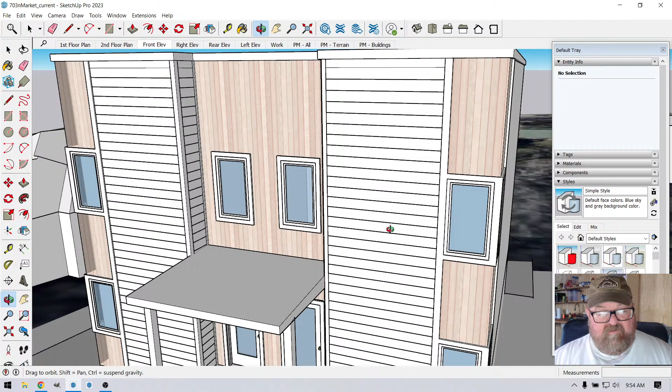It's not typical. Most people wouldn't try this too much because it takes custom framing, and builders and developers don't want to go out and work on the job with their framers explaining everything. Me, I like being on the job. That's one thing when I started Artisan Construction LLC - I said I'm going to be there when the framing's going on, because most builders just want windows that are easy, placement's easy, no questions asked.

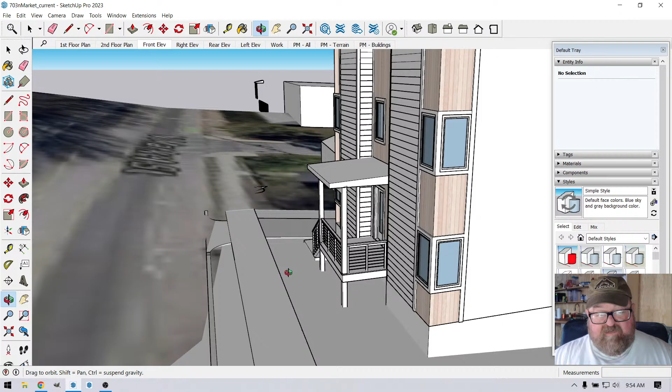So anyway, I do these drawings in a schematic mode at first, and you can see it's just a shell to get the concept down and understand how close this needs to be to the street. This is in an urban zone, a special zone where they really want you to put the buildings closer to the street, and fill up the lot. They don't want you to have a little tiny house in the back corner because it screws up the streetscape. This terrain comes from this placemaker extension.

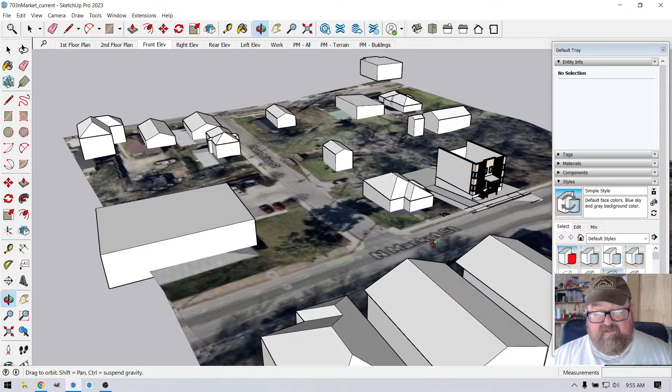Anyway, it allows you to download geographical or topographical information, and it will attempt to actually put the buildings there. Obviously it's got limited information from the site, but it's kind of cool because it gives you an idea. Now, these townhomes from here down are going to be as tall or taller than our building.

So anyway, let me get to the floor plan, and I'll show you what I was talking about for the townhome versus duplex. Ours is oriented this way, just on perspective. This is the street out here, and I haven't put this in the proper layer yet, so it's showing up on the floor plan.

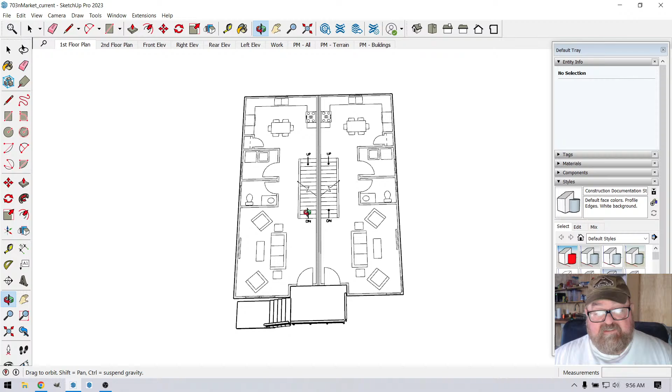But basically, a duplex is - well, let's just turn on the site plan. Where's my site plan? Oops. Doobie-doobie-doo, where's my site plan?

Tags, site, property lines. Here we go.

You can see these inner city lots are kind of small, and well, this one's not. Yeah, it's 50 feet. So the typical urban lot is 50 by 150, but this one's a little bit deeper, 156.

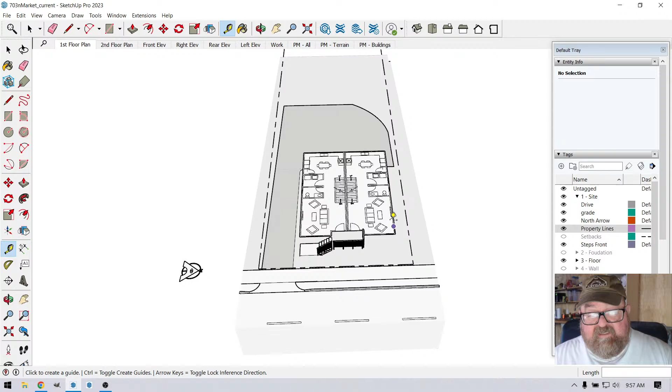And so on a duplex, you have just one single piece of property. If this were a townhome, there would be a property line down the middle of this property.

And this developer, he's a friend of mine, and he's really awesome. Mitch Everhart. He allows me a lot of freedom on these projects, and that's why I love building for him.

But in this case, this is a duplex, so we can build. We still have to have the same separation between the units. In other words, these two separate walls with an airspace and flame retardant. Anyway, it's a whole firewall system, but I don't want to get into that in this video.

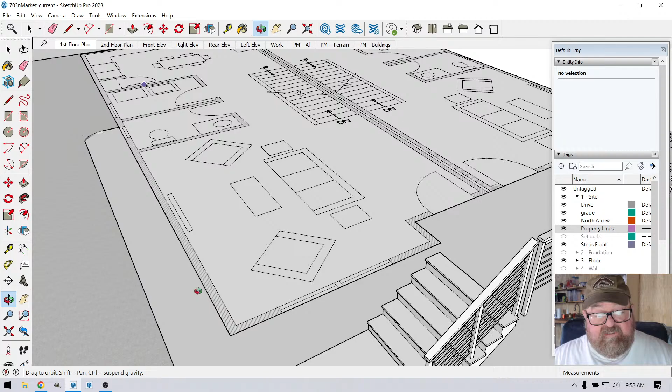What I'm trying to do here is, I had these windows on the front like this, and I thought it would be cool to be able to see down, if you're in the living area watching me on your TV on ArtisanTony, then you'd be able to look out the window at the same time and gaze like I do. Like I've got my window here where I can just turn and look out at God's gift of nature to us.

So in this case, it's a duplex. It's all on one piece of property, and it just has to have a fire separation, the wall between the units, but they can appear as one unit.

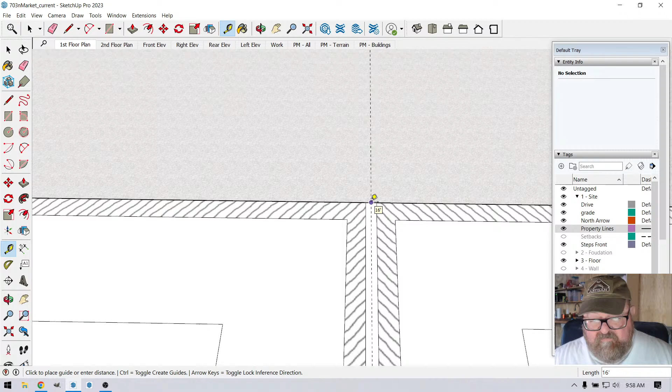A townhome would have a property line down the middle, and there would actually be, is there a middle? There it is. There would be a property line there, and these two would be owned by two separate people. So there you go. There's your lesson in townhomes and duplexes.

But what this video is about is, I want to get this effect. And I lost my little corner drawing. Let's see if I can undo. There it is.

I was going to show you how these things are normally framed. I guess I can just leave it there.

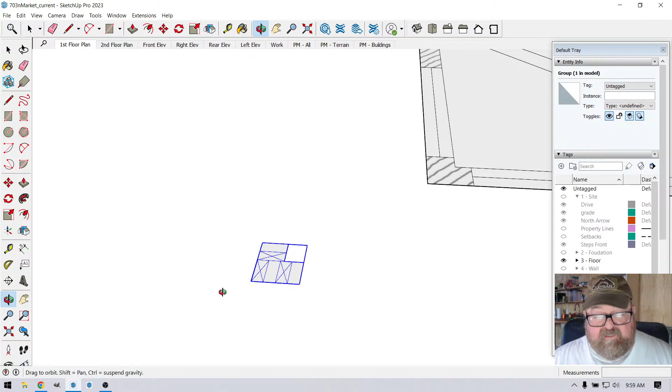Normally, and I'm going to show you this through actual 3D stuff here in a minute for studs, but on the plan view, what you would see is on a corner, you would have a 3 stud corner. We use blocks in the middle, and that's why there's a space here.

These X's mean you're cutting through something. So in this case, we're cutting through at about 5 feet off the floor, the studs, so you'd have an X to show you're cutting through, and these other ones would indicate that they're shorter than a stud.

Okay, so this actually, what we would do in the field is we would put a little, see if I can draw this freehand. We put a little O here on the plate, and then we put a C here, right, for corner.

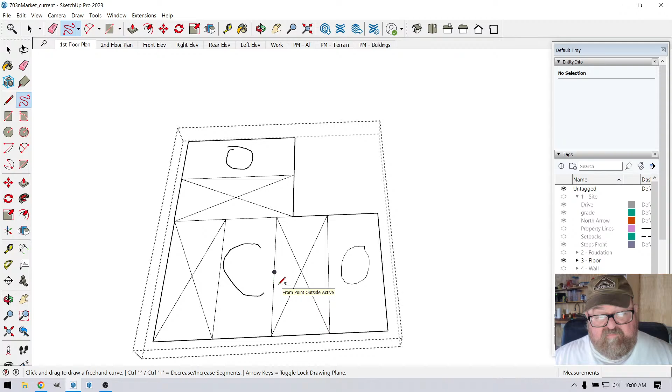So this is kind of how you can do the layout on your plates, and it tells the guys who are helping you frame what to do. That means this is a jack to hold up the header, and this is a jack to hold up the other header. Now what I'm going to try to do is use Medeek wall extension to see how close I can come to getting this.

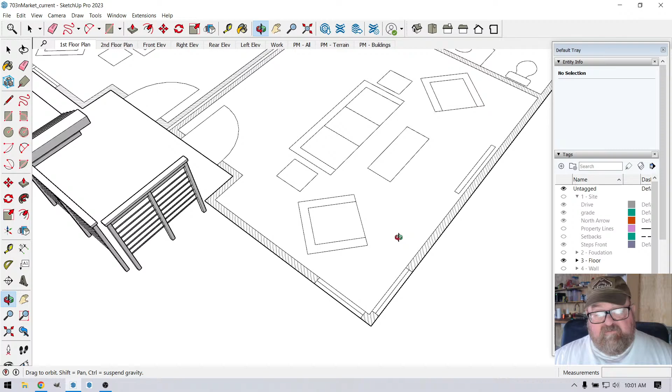Alright, so what I'm going to do is I'm going to use Medeek, one of my favorite wall extensions, not just wall extensions, wall, truss, roof. And I've got some walls that I've built before in here, and I've saved them, so I'm going to load 2x4 8-foot exterior wall. On the second floor of this building, it'll have 8-foot walls. On the first floor, it'll have 9-foot walls.

So I'm just going to kind of pretend I'm on the second floor, even though I think this is the first floor plan. But it doesn't matter. I'm just demonstrating how I think these windows are going to work. So I'm going to load that, and I'm not really going to pay too much attention because I'm going to go back and redo all this stuff.

I'm just going to, I got the wall, yeah, I got the wall layer turned off because I'm in the floor plan view. So let's turn wall on. Let's see, and let's turn wall scheme off. Okay, now that should work.

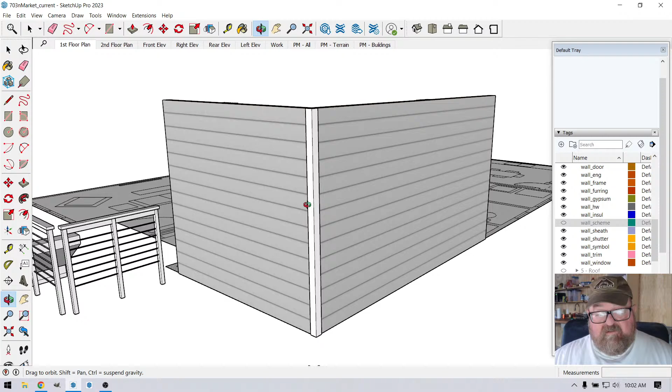There we go. I'm just going to draw just that much wall for now because we're just talking about corners, right? And the issue here is how can we get standard windows instead of paying—I don't know if you've ever seen corner windows.

We'll just take a quick look. I know I keep going down rabbit holes, but I think it's important to at least understand these windows.

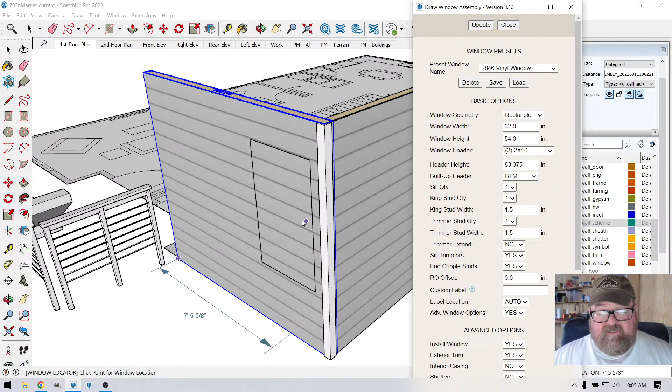We're going to come up with a nifty way, and I'm going to do it using Medeek extension because I just want to draw this quickly for this video. Now we're going to put a window in—this is my window, I've got a window I like, 2846, load—and see right here, it doesn't want to go. It's using logic. Now normally if you were doing this, that would make sense, right? I'd put it as close as I could.

Now what's funny is it's letting me put it closer over here, and that's because of the way the corners are framed. Depending on which way he's got his corners framed, whether this is the lead wall or that is the lead wall. The lead wall is the one that's built first.

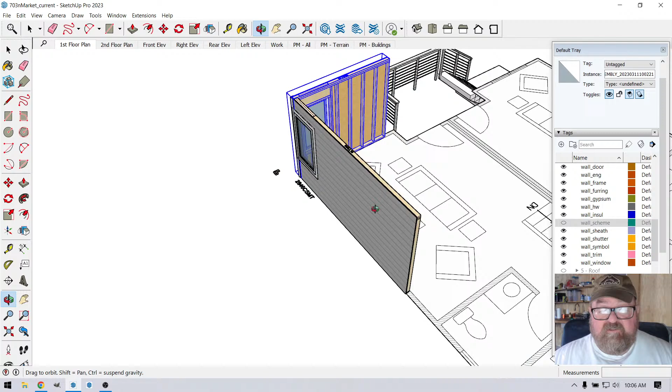And in construction, in residential construction or any other construction pretty much, the longest wall is built first. And we're going to turn off the siding right now just to—

It's wall cladding and wall sheathing, just because it's going to be easier to see. We want to turn off that too. Yeah, it's going to be a lot easier.

So normally what you do is you build these long walls first, laying on the floor. And you build the longest wall first. The reason you do that is because you go from the longest to the shortest walls, and that becomes very obvious to you when you're building.

If you built the short walls first, that would be in the way of building the long walls. So you build all the perimeter walls first, and you build both long walls first. Typically what we would do is build this long wall, leave it laying on the floor, build this long wall, leave it laying on the floor, and then we'd raise them at the same time. And then we'd come back in and build the shorter walls and raise them up, progressively.

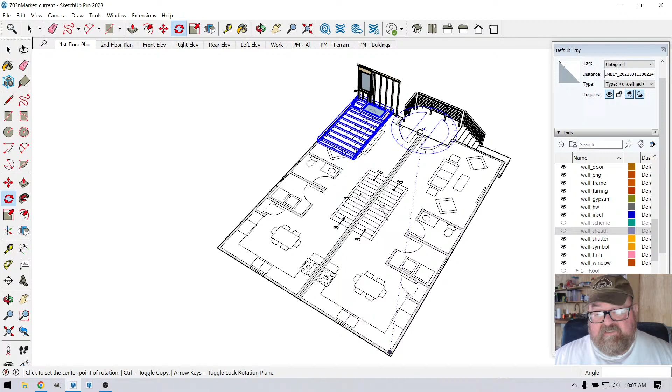Well, see here, actually on a duplex, this middle wall will be built first—these middle two walls will be built first. You build one side, and you do all your drywall, your Type X drywall work, and there's new systems now that you can use. I'm going to redraw this to show the new systems where it's just one thickness—I think it's Gypsum, USG has a product, it's just one thickness in the middle—and then you build a typical wall on either side of it.

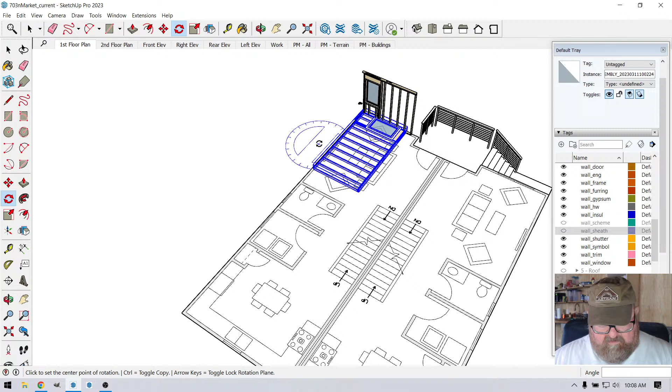All that would be done first, and then these two long walls, and then the shorter ones. You progressively get to the shorter walls, and they're not in the way. And the reason that's important is, I think, because of what happened going around this corner - I drew it this way, so it built the leading corner on this side of the wall.

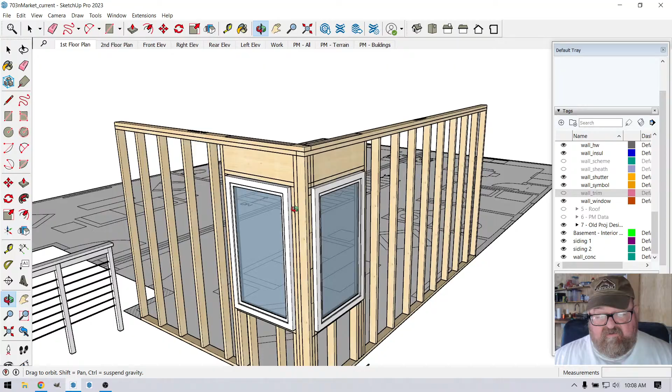I want to turn off the trim for a second too, because what I'm really trying to show is the framing. I knew at some point I'd have to explode these walls, but I wanted to get it to this point because it's a lot quicker using Medeek's extension just to demonstrate what I want to do.

So what I'm thinking about doing is exploding this now because I can see some conflicts already, and I'm going to show you how I want to do this. I've got two different ways of doing it. I think what I'm going to do is replace the corner with a...

Let's see - yeah, it's showing this wall as proper though, because the three studs should be facing this way. The only thing is it let me put that window in there. Let me move that over. Let's see how much it has to be moved over.

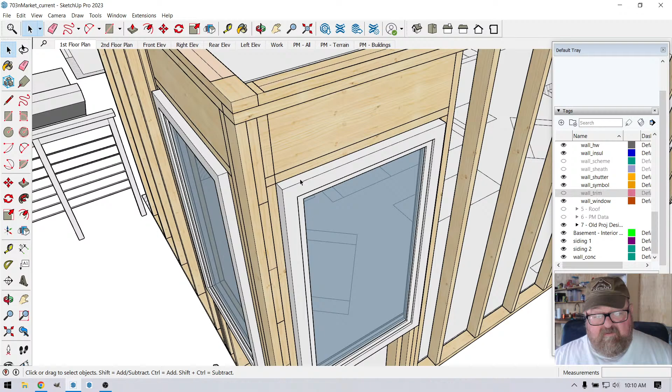1.5 inches, yeah. So this is another cool thing about Medeek's extension - you can move openings. What you do is select it, then move it 1.5. Would that be proper? Yeah, this is what I'm going to try to cheat right here.

I'm going to try to get that there. And I want to move this one over 1.5 inches too. Let's see - yeah, I want to try to move this one. Move wall, edit, move opening.

This one may be minus 1.5. Nope. It would be 1.5. See, it doesn't like it.

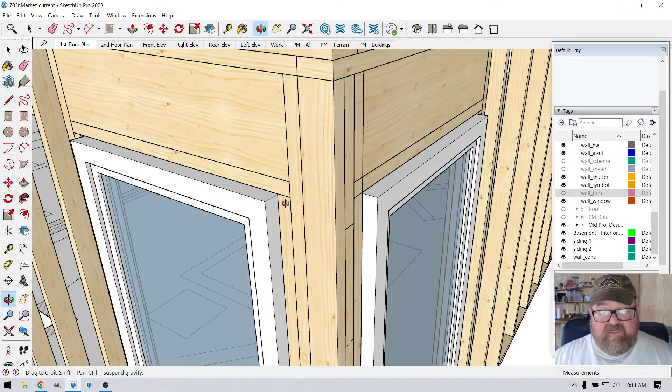That's what it is - since this is the leading wall and the corner is facing this way, it doesn't like me putting the jack for the header against the corner, and that's what I want to do. I want to put the jack against the corner, and that'll get me 1.5 inches closer. So I think sadly it might be time to explode.

And I got an extra stud in here. Let's see if we have any comments so far.

No comments. Everybody's watching cartoons on Saturday morning. What time is it? 10:11. You should already be - cartoon time is over, people.

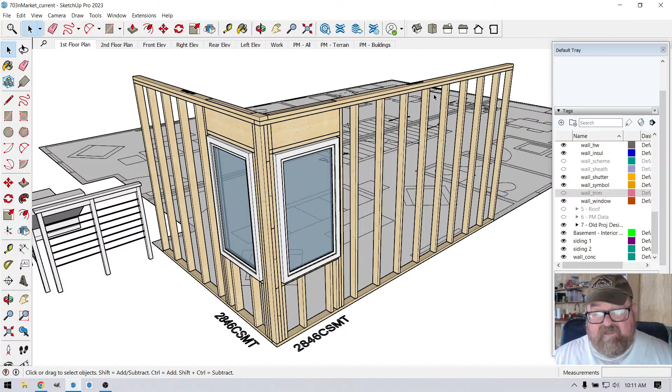So I don't know, I don't like exploding my Medeek walls, but I'm going to go ahead. Thank you, Nathan, for all your work on these - you saved me about 2 hours of preparation time. So now let's see if we're okay.

That needs to be - well, let's see if I can. What I want to do - I know there's an extra stud in here because of that.

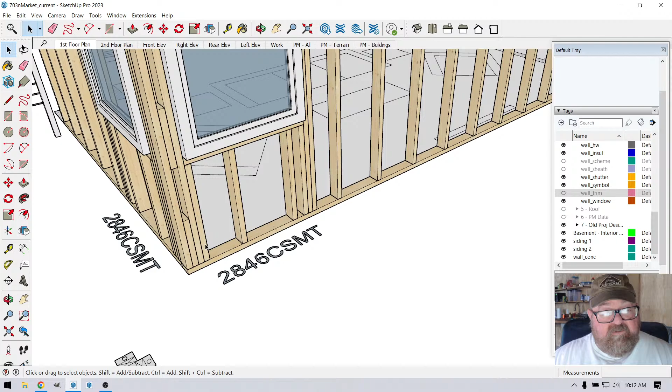Oh, that's the window. I'm gonna explode the windows too. There's this stud right here, right there. I want to delete - you see the corner, we're very efficient with corners.

We take the blocks that are cut off. This is why California corners are dumb - I'm sorry, they just are. We take the blocks - you see, when you make a jack, this is the jack right here that holds up the header. That block is 10 7/8, 10 3/4.

Okay, we take those blocks - we cut all of our jacks first for doors and windows, so we've got a bunch of blocks, probably 50 of them left over. And we use those blocks to make corners and T's and stuff. See? So there's no waste. There's not that much waste in construction.

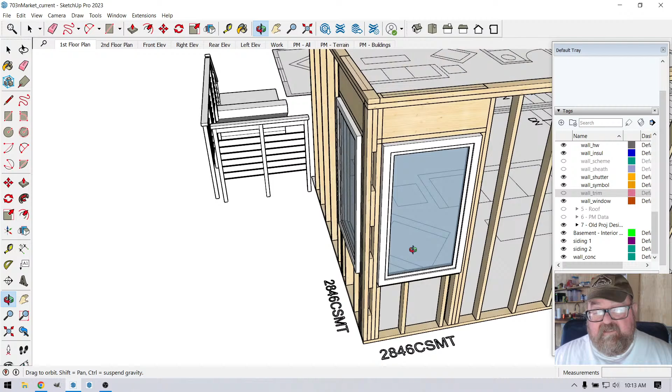Now, in this case, I think what I'm going to do - it just occurred to me - to keep the building inspector happy, I'm going to make this solid. I'm going to make a 3-stud corner here.

Oops, missed - wasn't paying attention. Okay, now I can put my jack against - okay, there's a stud right here that needs to go.

Where is that? That line right there needs to go. What is that? I want to move this out of the way for a second. I'm gonna go over 3 inches.

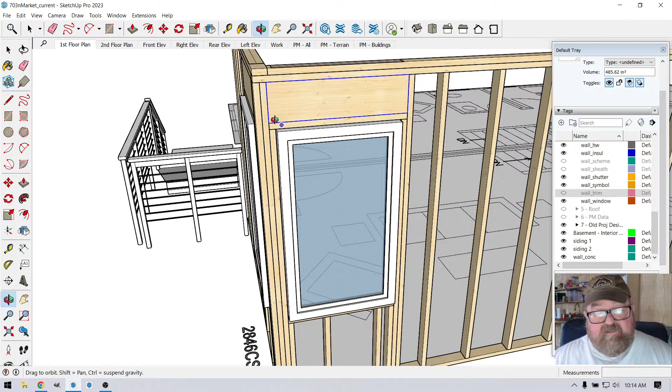That load is taken care of all the way down. The only other thing to do would be to get a 4x4 and put it in the corner, which would be 3.5 both ways. I might look at that.

So then what I want to do here is the same thing. I want to get rid of this corner, and there's two in there because of the wall and the window system, and I want to move all this over.

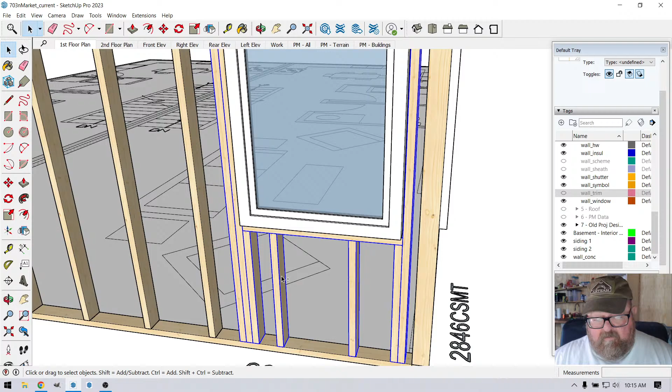Am I picking everything? I feel like I don't have everything, but I'm going to find out right here. What did I miss? Oh, the window. Yeah, I knew there was something, it just felt wrong. Let's see, I just want to go that way, 1.5. Yep.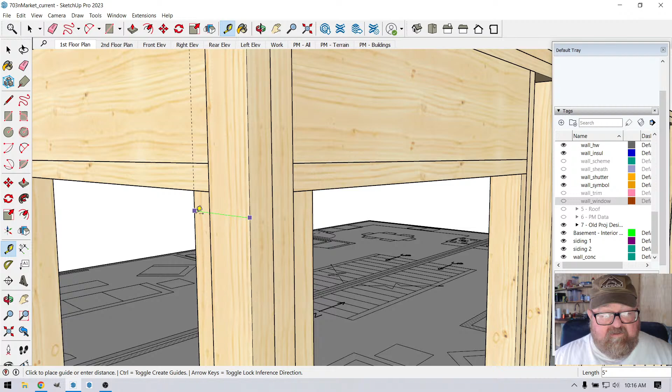And if we turn the windows off, it might be a little easier to see. Yeah, that's a good idea. There we go. So now this is not going to be perfectly symmetrical, okay, because you're going to be about a half inch different one way or the other. So that's 4.5, and that's 5. Yeah, so it's only going to be a half inch off out of symmetry.

Right, and this is why, honestly, this is why I wanted to do - well, what I might do is change the leading corner, because I'd rather this - I don't know, the side view is going to be, yeah. So if this was 3.5, that would push that way a half inch, so it would be symmetrical with this. I don't think I'm going to worry about that because that's just another level of complexity to add to the project.

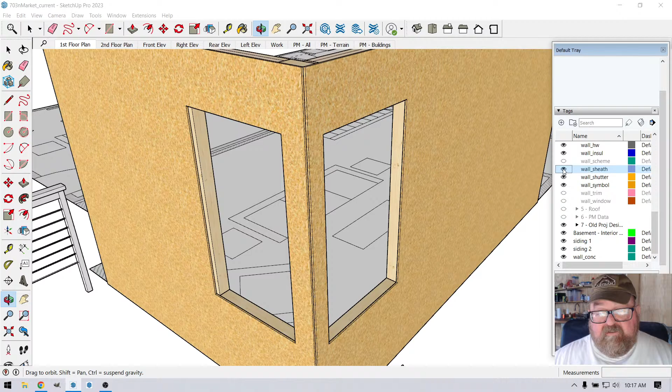So now what I'm going to do is turn the windows back on, and I'm going to turn the sheathing - well, let's turn the sheathing back on first, and we'll fix that. Yeah, so I really don't like this ugly OSB look. I know we use it, but still, it's ugly.

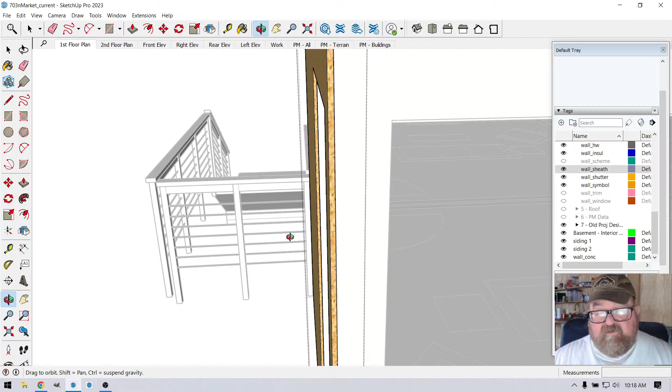Let's see if I can get out of this. Get this over to here. Oh come on, there we go. Why giving me a hard time? There we go. And this one should be right because it was placed - Medeek put it where I wanted it, or I guess I moved it. That's that, you see, so it's not going to be that. It's going to be a little noticeable, but not a lot.

So then we'll put the window back in, put the window back on, and then we'll turn our siding on. Now the siding is going to be different anyway, a little, yeah. I'll show you in a second. Let's see, how can I - this will be over here.

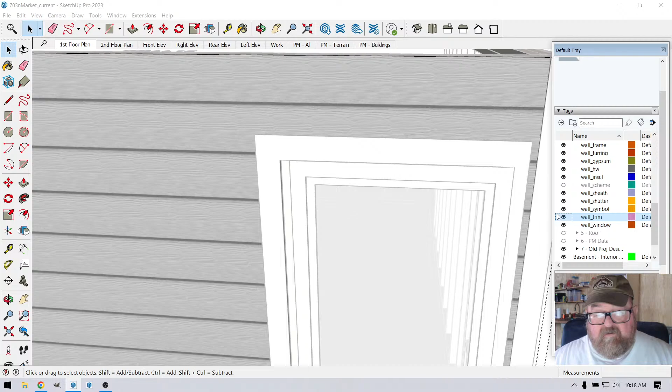Let's see, where's the trim? You know, trim should be against the... okay. The window trim should be... okay, let's move it over 1.5 inches, like that.

I don't know, they've got the wall extension - the siding is not exactly perfect, but I'm not going to worry about that right now because it's a minor thing. The siding's going to go where it's going to go.

What I wanted to bring now was this issue of the corners. So if we go back to my - let's save this view as work, or working view. I have these views set up so I can just at any time update what I'm working on, but then I can go to my front elevation.

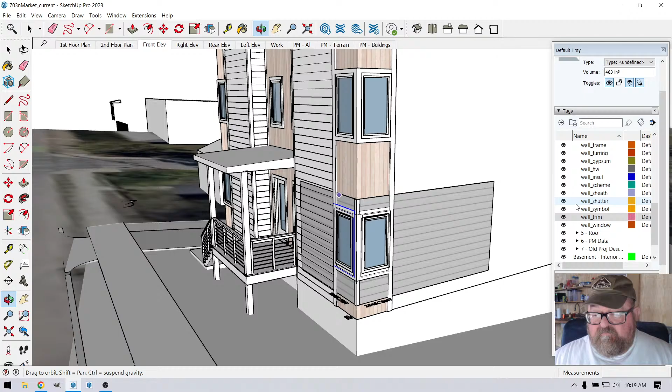And you see, it's not going to be too far off from what I have, but if I turn off that, you can see here if I look at this corner, it looks nice, nice and symmetrical at the corner. Or did I draw it symmetrical or not? 5 and 5, yeah, I drew it symmetrical, but we're going to check that dimension.

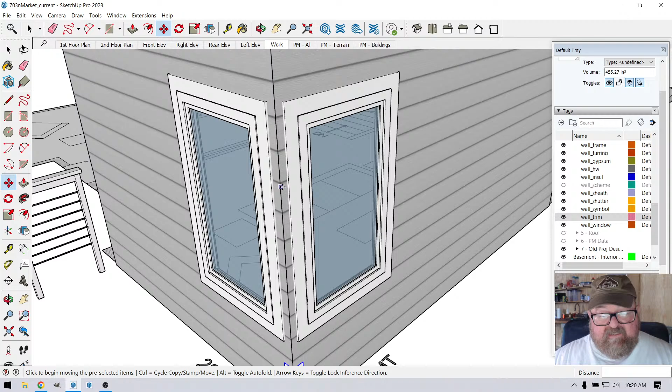Now let's go back to our work view here, and we're going to see what it actually is, because this is all actual size. So what I'm going to do is turn off - let's see, I'm going to move this out of the way for a second. And that siding should be cut back, but again, I'm not going to worry about it.

I thought the Medeek extension cut the siding around the trim. It must just run it to the opening, because I guess it doesn't matter since the trim is thicker and it doesn't show. But now we've got to deal with this trim.

And I'm going to grab this, and I'm going to grab it like this, and I'm going to pull it out to where it meets the other one like that, and then I'm going to grab...

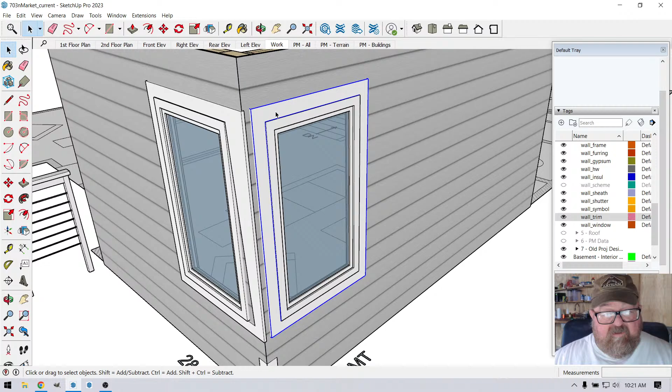Now I have actually thought of a way to make this actually less bulky at the corner. Wait a minute, I didn't really mean to do that. I didn't really mean to do that. I messed that up. I realized I messed that up just looking at the other one. I was only supposed to grab the end.

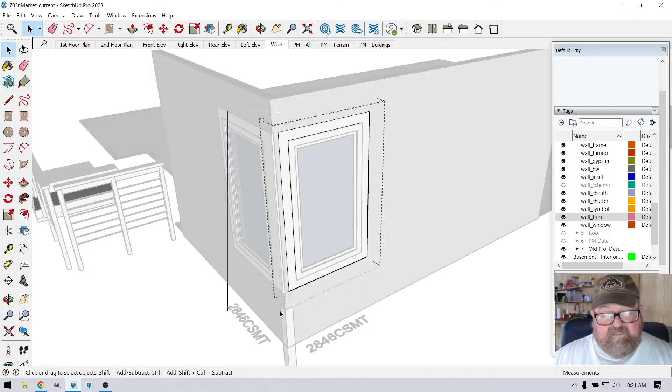I think I'm perfect, but I'm not. I should say I like to think I'm perfect. Let's see, is that just the end? Yeah, is it?

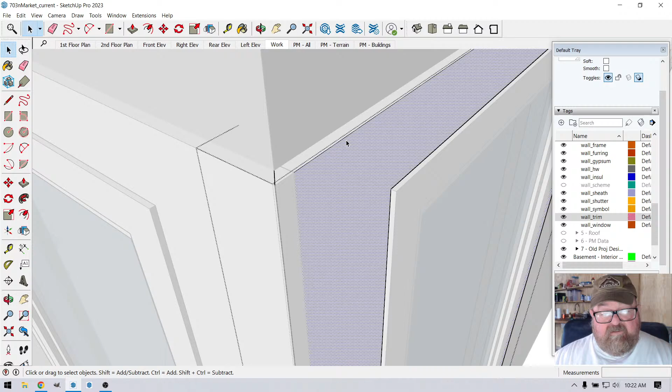No, because I grabbed that little short piece, so I gotta get this view so I don't grab it. Now what's awesome about this is the Medeek extension saved me all kinds of time, because I would have literally had to move that back manually, since what we would do is miter these corners like that.

Now that's a little bit wide of a corner, but when you're standing back at distance, it's really fine as far as conventional methods go. Let's see, if I go back to my front elevation, oh, I see I don't have... let me turn this wall cladding off.

And wall sheathing, and wall framing. I don't have corners. There's going to be corners here, but they'll be really low profile. And really what I'm trying to demonstrate here is the siding is not the feature.

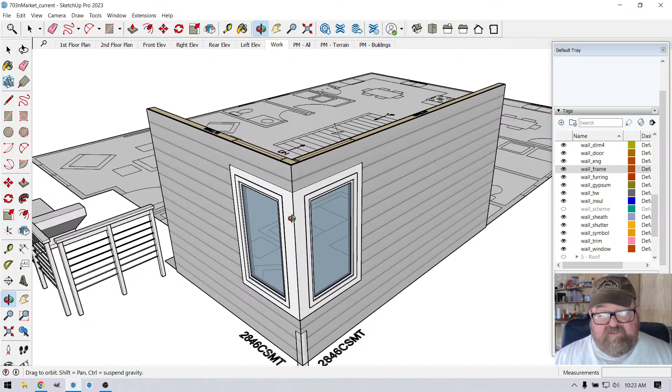And so really this would go away for now. That's not going to be too bad.

Now here's the thing, these windows probably cost about $400 a piece, so you got $800 in a corner window versus $3,000 or $5,000. I literally priced a corner window, and it was from just a moderate grade, it was like $3,500.

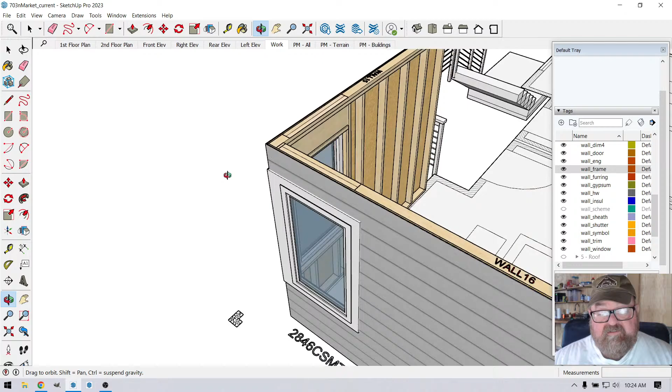And if you go to a commercial grade corner window, an architectural grade, you're going to pay $5,000. What I was going to do was run these headers back and cantilever them out, running these two windows together to the very corner, then cantilevering these headers back. But I was afraid the building inspector would raise an eyebrow, so I'm trying to stay within conventional methods.

What happened to this header? Oh, that part, I knew I didn't get everything. I knew it, I knew something was wrong. There we go.

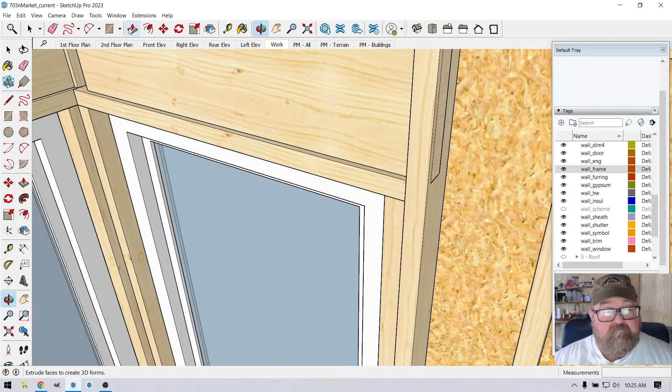Is that right? .5, there we go, that's good enough for now. So this will give you a little bit of a corner here. What I might do, what I'm gonna do, is probably...

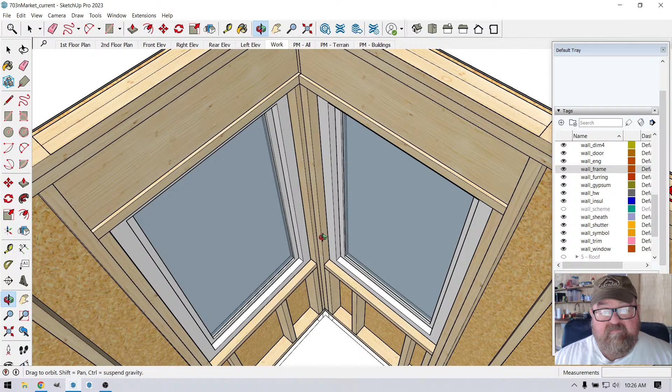Address this corner. See, this is one reason why you don't want this to be this way, because you're gonna have these two little corners. I'll have to investigate and see how it would look if we address that corner, because it might look kind of weird to have that little half-inch inset there.

It would look better if it came out like this. Where's my pen, where's my line thing? But then you got to ask yourself, how do you address it for the window itself? It would look better like this. Then if you're just looking at it, the drywall would come out and there would be a corner there.

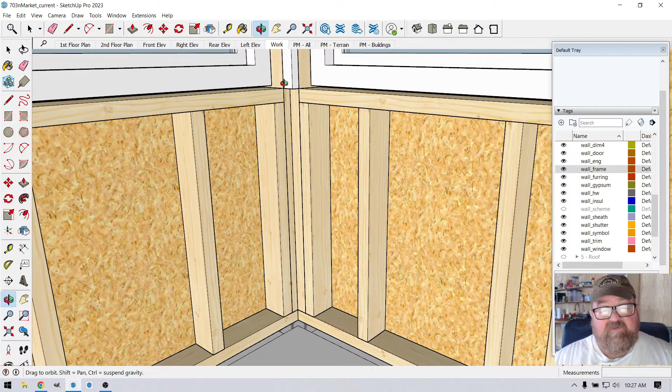So you have to ask yourself, we could probably take care of it with a sill. Yeah, we would let the sill come out, we would have this up an inch. And then what you would do is have a sill here.

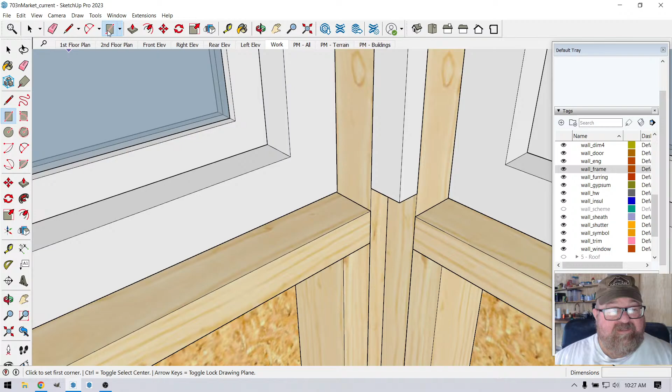What do I do? Is that not a rectangle? That's weird, what the heck? Oh. That's funny, see it's funny when you're drawing in 3D, sometimes you get a little freaked out because you think you're on the same plane. You think you're on a plane, and then it turns out not to be.

So that would come to there, and then this would come here and go by an inch. Of course, I don't have the drywall on, but let's just say it goes by a half inch, or another half inch, and then you have the same thing over here. So what that would do is create a...

And this is actually correct. You would shim. You never want to set your windows on the bottom on the framing, you want to put a shim on both sides. That gives you space to insulate. Plus, if this framing is a little lumpy, it keeps your window from being on a lumpy sill, and because you don't want any loads from it.

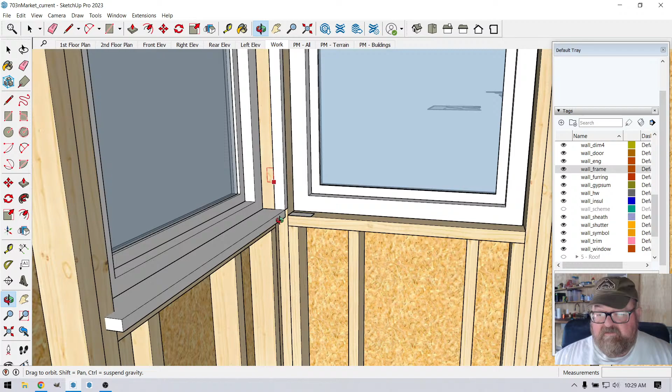Should be a space on the sides too. Is there a space? Yeah, I just got it off center. But you want to be able to run the foam around, or caulk. I like to foam them with window foam because it's not as expandable as the foam you put in the wall. And this comes out to there, we give it a little return on the end, like that.

That's one way. And then you say, well, what about up here, ArtisanTony? What do you do up here? Good question.

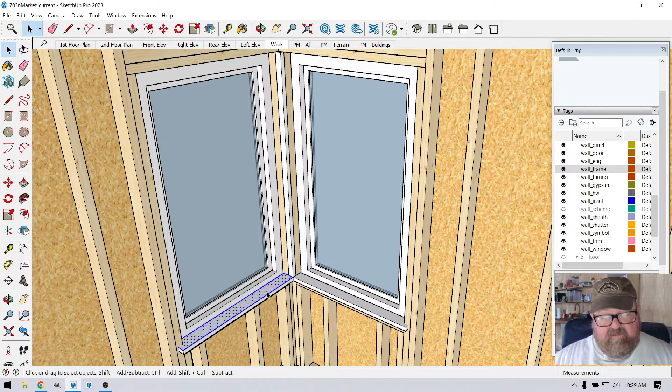Maybe what we do is we do this up here. I don't know, we'll just have to get creative. I'm not going to give up my dream of having what I want.

Okay, can I get rid of all this stuff? This is what I get for not... I'm going to have to delete a line when I get up here. This might be a little funky. I don't know, we'll have to get creative. We're not scared though, we're not scared of getting a little creative.

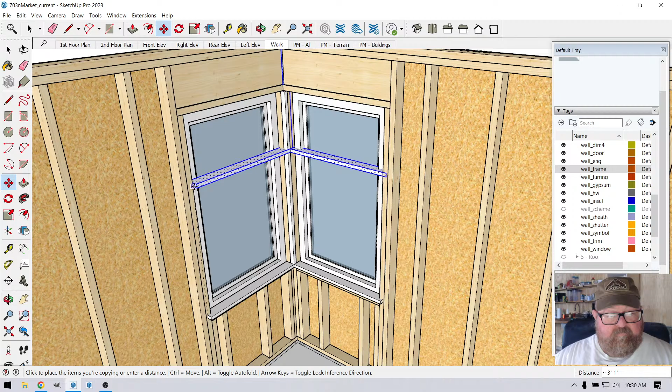I'm trying to find my axis. There we go, we're going to lock it, and then I'm going to put it right. Let's see. That should be right. Let's see, would it be there? Yeah, there we go. Then I just delete this stuff.

It's probably a little booger up there, yeah. So you could do something like that on the inside to give you a nice clean corner and a little corner effect with the trim. I think that would be kind of cool.

I'm digging it. And see, now when you're sitting in here, you can look out the front to the street, or you can look down at Collier's pretty townhomes down that way, which ours are going to be prettier because I'm more creative than he is. But that's just, I was just born that way.

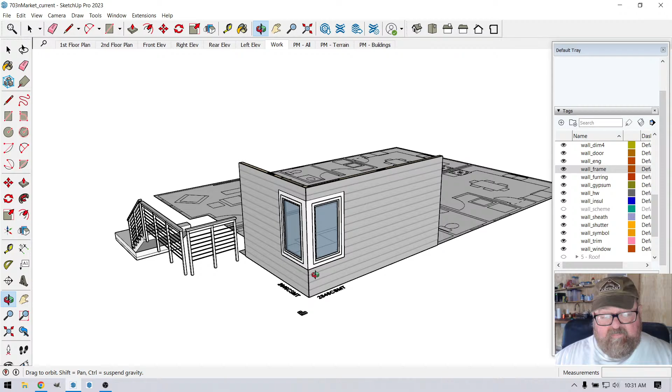I can't help it. So the other thing is, let's see, what layer are these things on? I forgot to turn off the... These are pretty cool though. These are wall callouts. Oh, that's the window callout. So you can turn those off.

I have to delete it now because I exploded it. All right, and then you got callouts for the wall themselves. And what this is related to is, if you wanted to do a materials list in the Medeek extension, you can go to engineering.

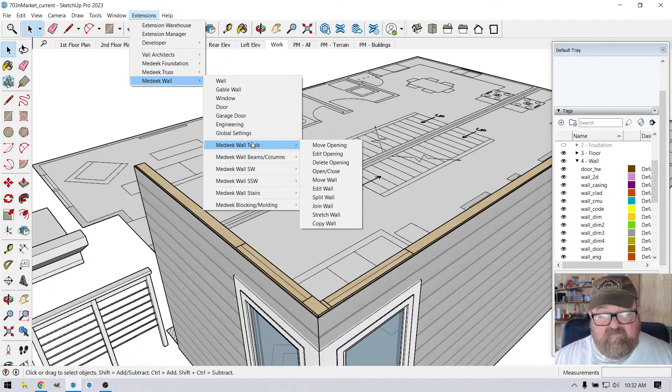What is it? I don't use it. I do my own, I have my own method for estimating. But if you go to engineering, there's a... you got to select the wall. Okay, so what you do is you select the walls, which I exploded them, and then you go to engineering, and it'll show a list.

I'll show you right quick. Since I brought it up, I gotta show it now, don't I? We'll just do this wall, just wherever, and then we'll hit the space bar, and then we'll select it. I think this is how you do it. I don't use the...

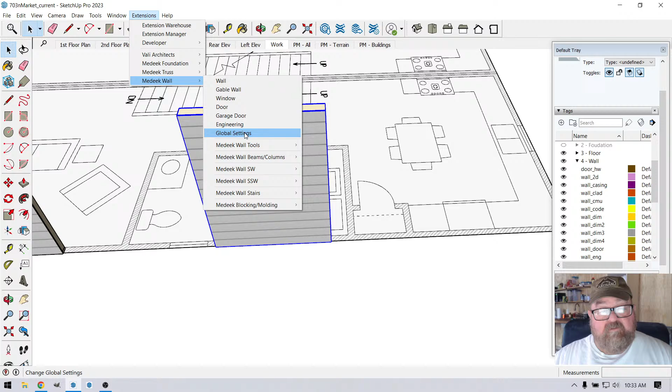Wall, garage door, global settings, wall tools, stretch. Somebody help me find it. Global settings. I installed the new version, so I may have it turned off. Materials, sheathing, walls, doors, windows, guard, trim, insulation, hold downs, license. I'm not showing you my license because you'll steal it.

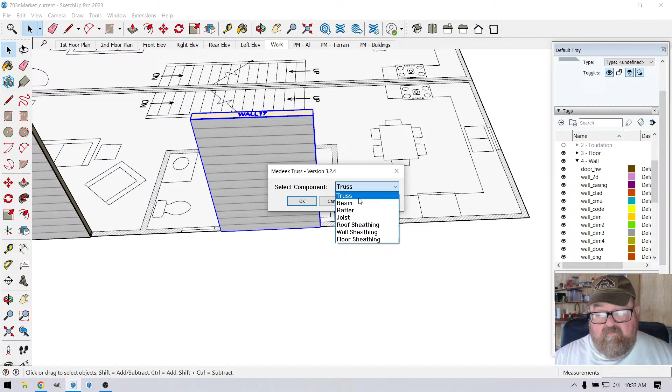Yeah, well, what you can do is, I thought when you clicked on engineering, select component. Truss, okay. Or what is that? Now I'm all curious. Now I've got myself curious.

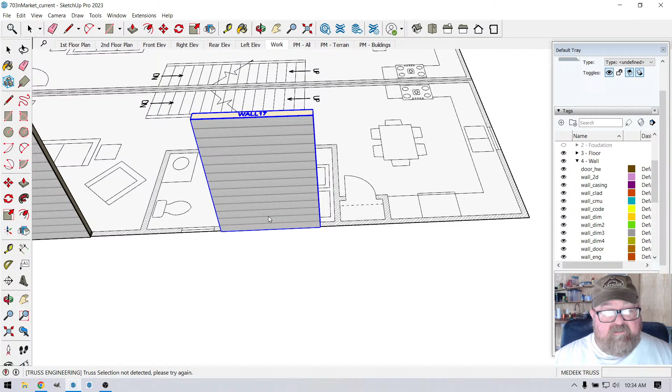4x4 LVL would keep the inspector happy. Yeah, I'm just trying to keep the cost down too, see, right? Because 4x4 LVL is something I have to go buy. But that's the thing.

We would still have this little inside corner. No, we wouldn't, would we? You know what, Russell? You might just have a good idea there. What I was going to do is just buy a 4x4, let's turn all this junk off.

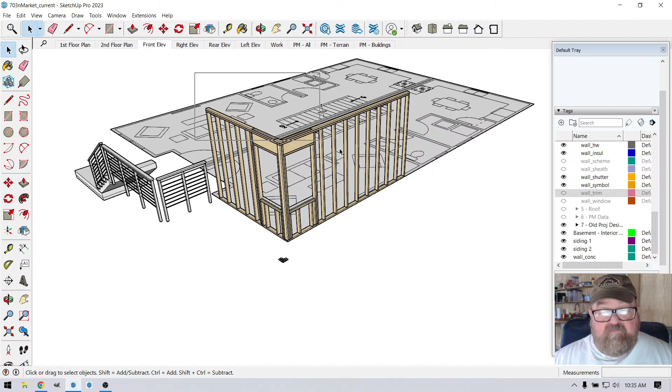Clad, sheathing, windows, wall window, trim. Let's go back. So let's just delete. What I'm gonna do, I'm gonna copy all this just for the fun of it and put it back there. I don't like doing work and then deleting it, so we're gonna do that.

I'm gonna turn this stud into a 3.5. Is this the direction? No, so I'm gonna move all this stuff back a half inch. This time I'm gonna grab... for some reason I thought those headers were grouped, and that's why I didn't get them both last time.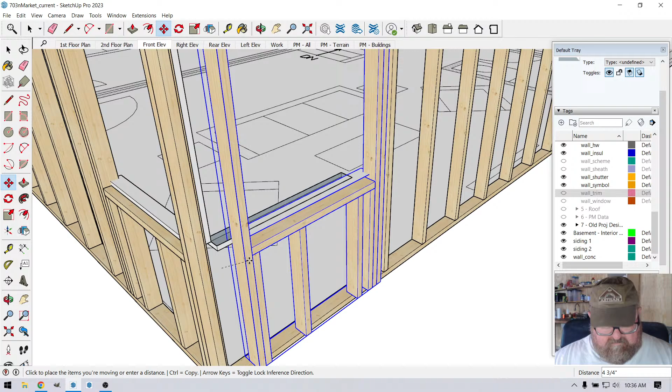I think I'm going to group them this time. Yeah, I'm going to group all this stuff, save from having to do it in the future. Let's... no, let's don't move that. Alright, so let's make group. I just did it though, didn't I? Yep. Now I'm mad.

Booger. I can sit here and work all day and not make one mistake, and when I do a live stream, it's like it's a disease.

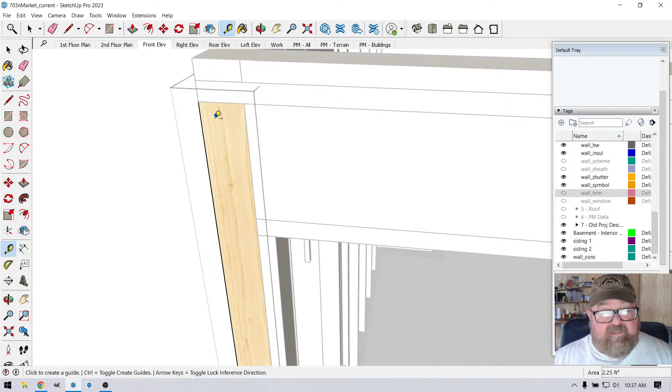Make group, half inch. Okay, now I'm going to take this thing and make a 4x4 out of it by bringing it over 2 inches. It should be 2, yeah, so that should be 3.5. That's what a 4x4 is. And now we have ourselves a corner, whether it's an engineered corner or a 4x4, we're symmetrical now.

This is one thing I mentioned earlier, Russell, when you weren't here, was maybe doing this 3.5. Now we're symmetrical, and we turn on our sheathing. And I think this side is good because we didn't move it. This side goes here.

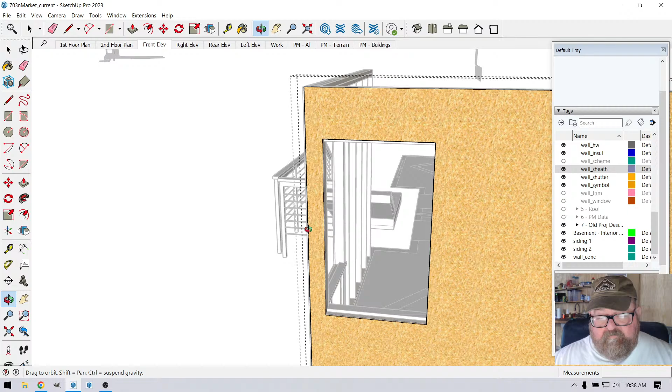Get over there to that corner. There we go. And this goes back, half inch.

And we can turn on our windows, and move them back. Move this one back a half inch, and then I think our siding is going to be fine because it just goes behind the trim anyway.

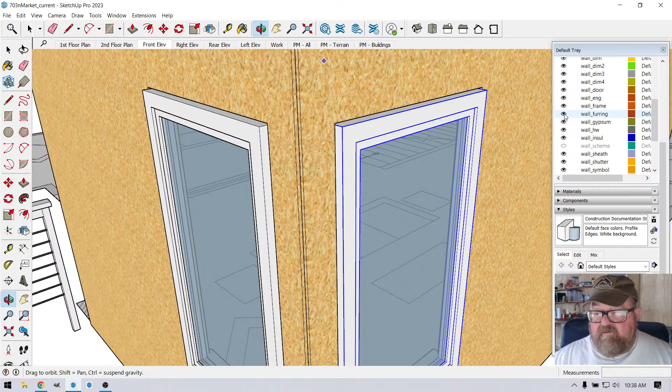But we do have to fix our trim, so we turn on our siding just for the fun of it, and we turn on our trim, wall trim. Got too many layers here. It's kind of funny though, because we're just making this side as wide as that side.

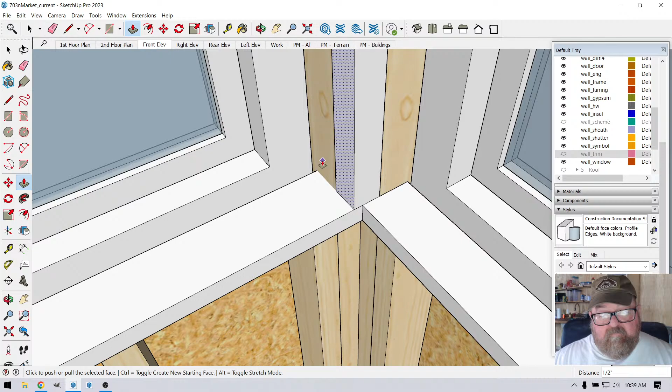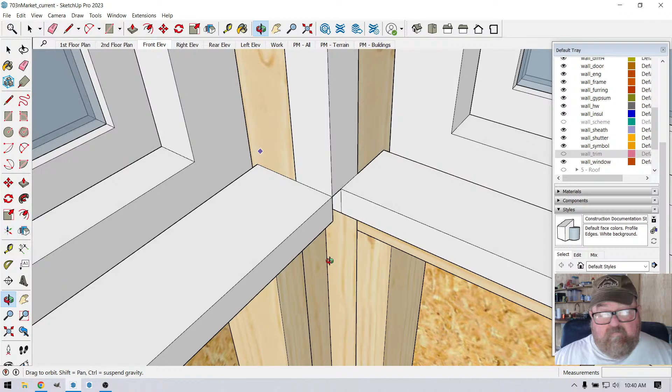Let's see, how can I get to the... that, yeah, you don't have to, let's see. Well, I shouldn't have to select that. Yeah, it would be like that. So we still have to do our little dealy thing because, why is that? Oh yeah, because we still have our jacks to deal with. If we didn't have our jacks to deal with...

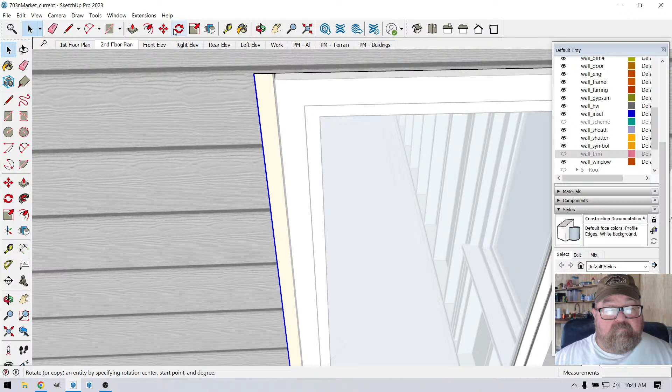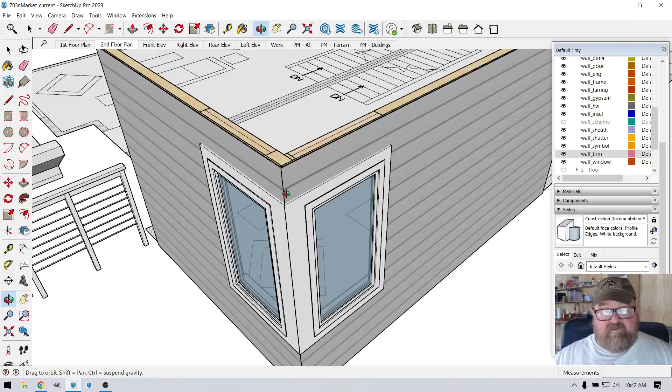What was this side? Was this the 6.5? 6? So that gets it symmetrical, but it doesn't make it smaller. We really aren't going to be able to get past the width of this trim unless we have something like a steel column. We could do like a 3x3. So I'm not sure, then it gets to be where it's not worth it.

You could make a small steel column in the corner. You could run the windows to it and all that, and have the windows meet. But you'd still have to figure out those windows aren't really made for that. That's the other issue. You have a flange around the window that is not shown on this. Medeek doesn't show the flanges, the nailing fin around the windows, and you have to have at least 1.5 inches for that.

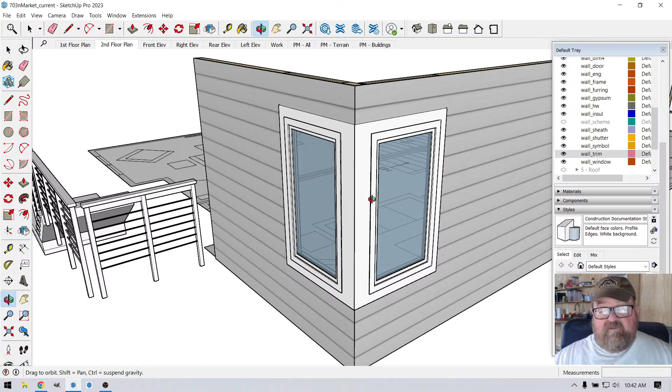So you couldn't literally take 2 standard windows and butt them together at the corner. So you're always going to have this kind of issue. But I don't think it looks that bad.

And I think if we save this as work, and we go back to our front elevation, it's really, what did I have before, just schematically, when I thought I could do this? I'm only 1 inch more than what I thought I was going to have. You know, that's not too bad.

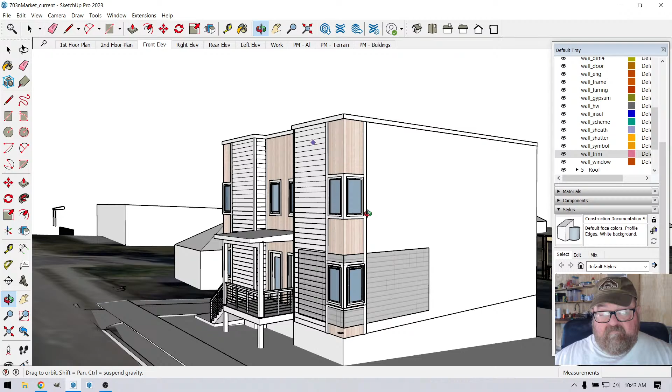Not too bad. But I want to get this, I really want this look, because downtown Chattanooga is this way. This is all schematic mode. I don't have those windows cut in yet. But yeah, so downtown Chattanooga is that way.

And if you're sitting in the living room, like on the first floor, you're going to be able to - and say I haven't changed these yet, this is the way I originally had it - but you wouldn't be able to look down the street if you were sitting in the living room. This way, that way is Chattanooga, look down the street. It's pretty cool down that way.

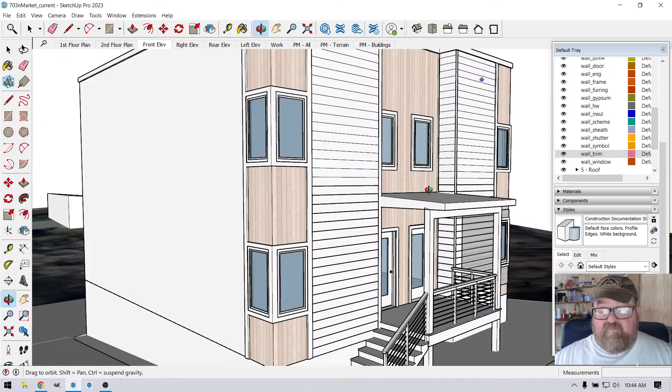So anyway, I don't know what y'all think about all that, but I thought that was a pretty cool way to deal with that. It's been a while since I've had to do it. I want to do it on this project, and one thing I like about Mitch Everhart is that he allows me to do stuff like this.

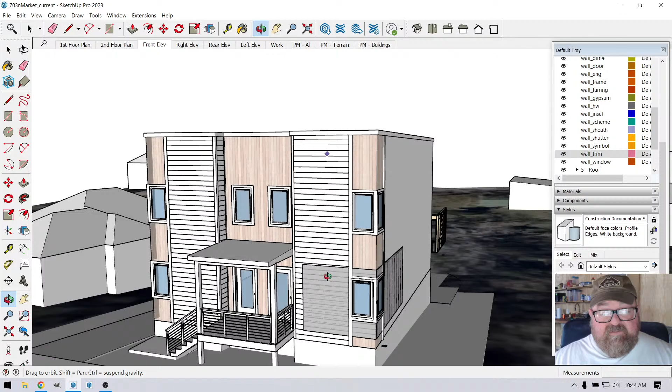I'm gonna go now build all these walls using Medeek's wall extension, because you know, I went through a lot of different versions. I've been through like 5 different versions of the building, and it's easier when you're just doing schematic stuff to show it just with regular tools, you know, SketchUp tools.

And then when I get it nailed down, after the schematic mode is complete, and I go into construction documents, I use the Medeek extension to then come and do the rest of it. So thanks a lot, and we will see you on the next one.